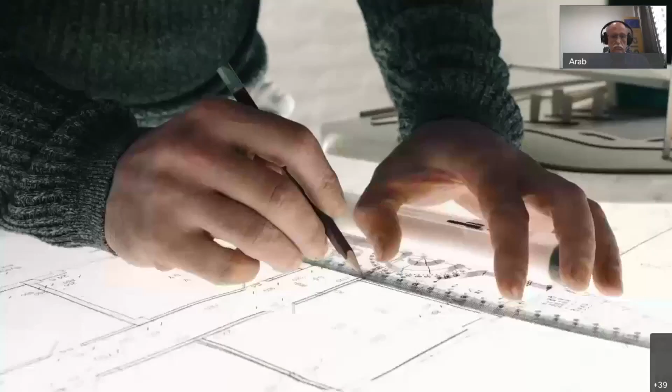Did you ever wonder how your home can improve the quality of your life? The way homes and buildings are designed and developed has a significant impact on the well-being of communities, people, and the environment.

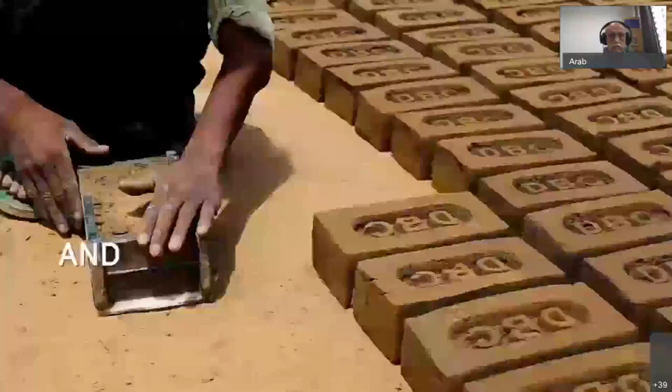In 2019, the Asia-Pacific region has become majority urban for the first time in history. With more than 2.3 billion people living in cities, the need for a sustainable urban future has never been more important. The building and construction sectors are responsible for 36% of all carbon emissions in the world.

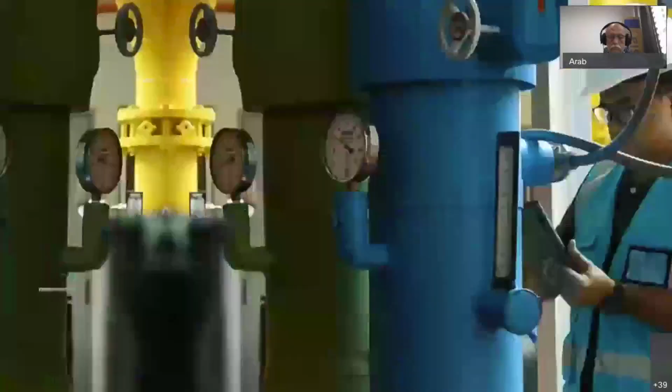Majority of these emissions occur when homes and buildings are in operation, from the energy used to heat, cool and power them, to construction materials, maintenance and renovation.

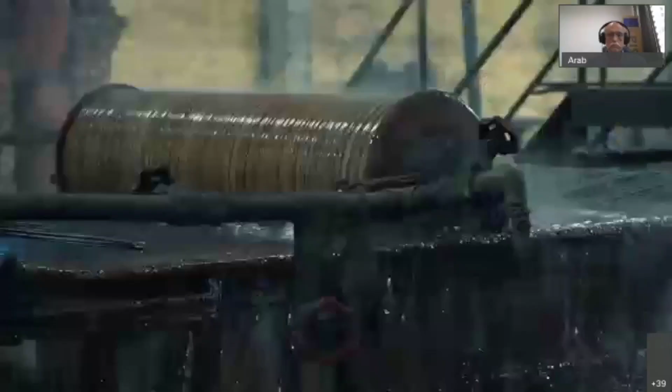Efficient use of resources, energy and water, pollution and waste reduction measures, responsible choices for design and materials will reduce energy consumption and carbon emissions, increasing the value of homes and buildings, driving economic growth, and improving the quality of our lives.

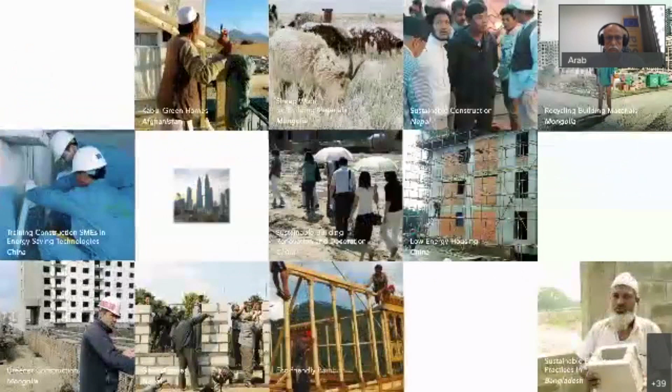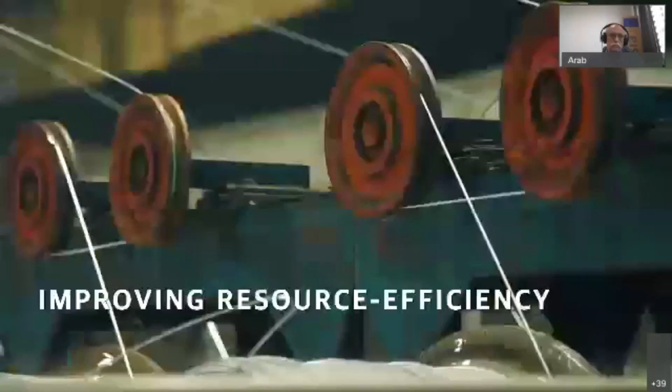Since 2007, Switch Asia has implemented 15 grant projects contributing to sustainable housing in South Asia, Southeast Asia, and East Asia. The program is also providing technical assistance to Pakistan on Green Building Code, and to Kyrgyzstan on energy efficiency in the construction sector.

The important support of the European Union results in improving resource efficiency and cleaner production, increasing energy-saving housing solutions and access to finance, and contributing in all countries to national strategies and policies on climate mitigation. The green recovery must begin where we live, work, and study.

Each one of us can make a difference. It is our common and shared responsibility.

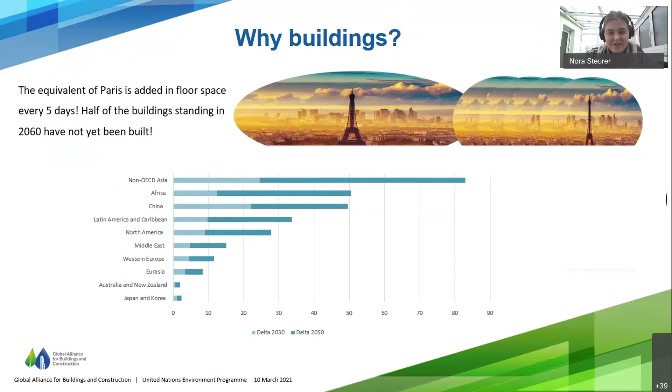A few words about us, for those of you who don't know us yet. We were founded at COP21, and we really have at the heart of our agenda climate action in the built environment. Our mission is a zero-emission, efficient and resilient buildings and construction sector.

We started with 79 members, and we're now over 160, among which are 30 countries. Our 3 objectives include to be a global advocate, to give the sector a voice in the climate debate, to be a trusted platform for setting targets and tracking progress, and to support countries in setting priorities based on their situation. I want to talk to you a bit about tracking progress.

These figures come from our latest Global Status Report for Buildings and Construction. This is an annual report which comes out every year to track the main figures and trends in the sector, and it came out in December 2020. What we see here is that 35% of final energy demand is due to the sector, and 38% of global CO2 emissions, which is actually at an all-time high.

So we see that the actions that are currently taken in the sector are not enough to turn the ship around.

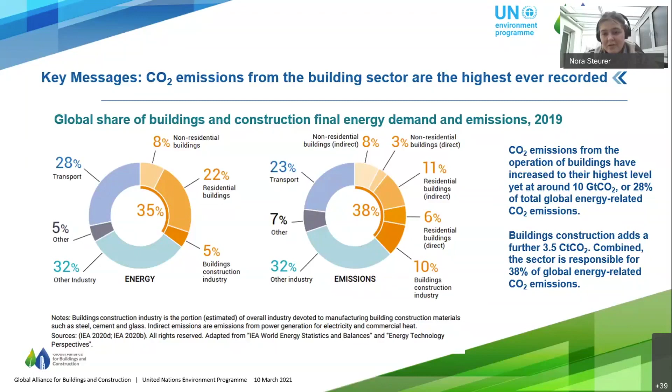This is, I think, very important to underline given the current situation with COVID-19. Of course, it has also impacted the global buildings industry. But we do know that investing into building efficiency retrofits, for instance, is very job intensive. This is good news. And in this sense, it's really good that the European Commission - I think Alessandra initially highlighted the EU renovation wave. Indeed, this is the right way forward, and this is really a win-win for the economy and for buildings.

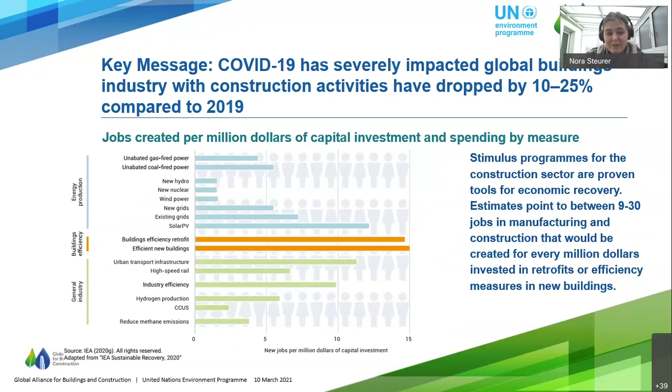Let's take a look at global commitments by countries. Let's take a look at nationally determined contributions. These are a really key vehicle to set the scene for the entire buildings and construction value chain. This can be sort of a North Star, where to go.

And we know that the great majority of countries mention buildings in their NDC, so this is good news. But we also know that the majority don't include concrete targets or measures, that they are not aligned with net zero targets, and that certain topics like cooling, which is also very important in Asia, or resilience, are often omitted. So there's a lot of work to be done, especially in the context of COP.

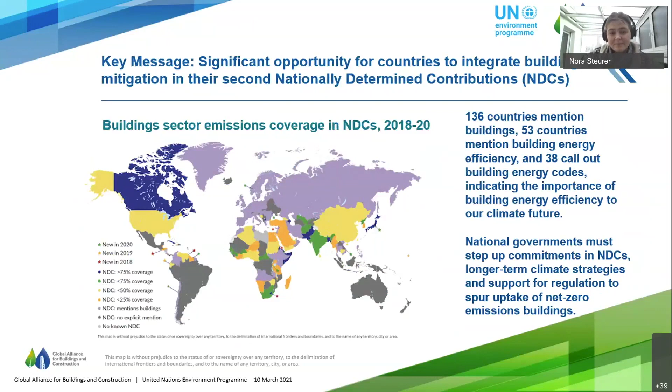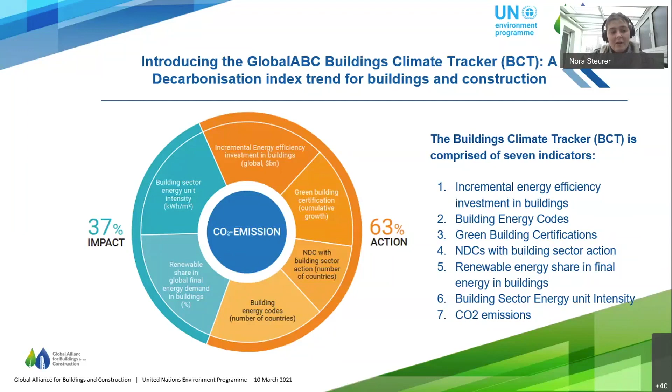We need COVID-19 to be used as an opportunity. We need national governments to include building systematically as building back better in their recovery strategies and in their NDCs, so that on-the-ground action can take place.

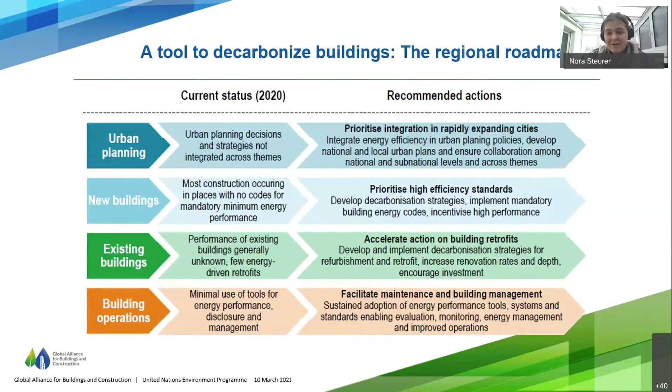I want to stop here. I have some more slides, but I think this gave you an idea. Of course, I'm happy to answer any questions. Thank you very much, and thank you for having invited me. Back over to you, Cosima.

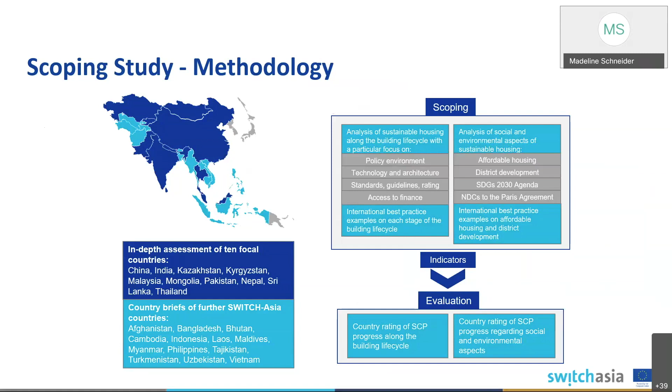I won't be able now to show you all of the details along the life cycle, but I will directly go to the environmental and social aspects of the assessment. In addition to the life cycle assessment in the study, we also covered the social and environmental aspects of sustainable housing. We had a closer look at the SDGs, NDCs, affordable housing and district development programs and the corresponding status in the assessed countries.

Regarding the building sector and more specifically sustainable housing, the most relevant SDGs are SDG 11 on sustainable cities and SDG 12 on SCP. But of course, there are also interlinkages with other SDGs, such as Goal 1 on ending poverty. The level of detail of sustainable housing goals in the countries' strategies varies broadly across the assessed countries. In some countries, already ambitious targets for emission reduction with a focus on energy efficiency measures in the building sector have been established, but others do not yet address housing at all as priority actions. Overall, as the region is one of the most vulnerable to climate change, adaptation efforts are highlighted in most of the NDCs as priorities for sustainable development.

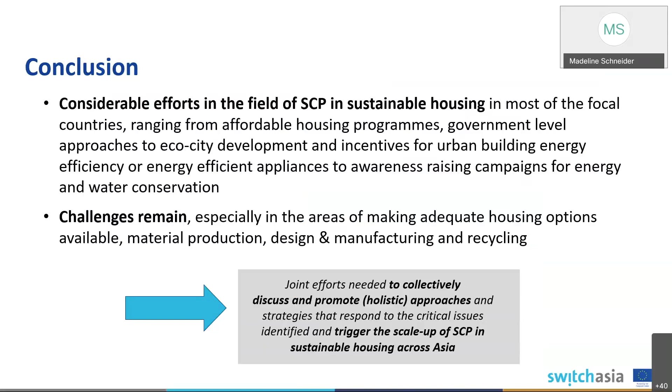But in order to address these critical areas, joint efforts are required to collectively discuss and promote holistic approaches that respond to the critical issues identified and trigger the scale-up of SCP in sustainable housing across Asia.

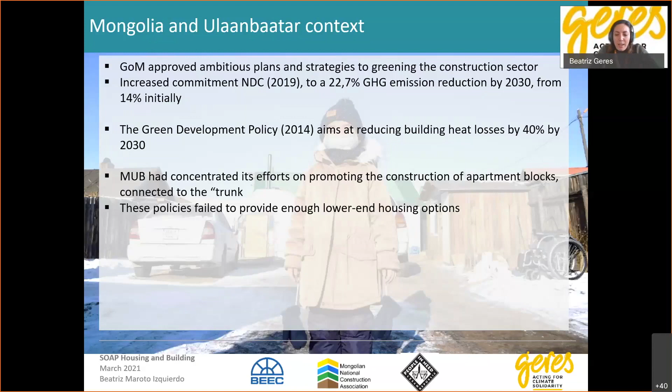So other solutions are being tested, as for instance, free electricity tariff at night to promote electrical heaters. This is helping with air pollution, but not with the emissions of greenhouse gases, due to the electrical grid being inefficient and polluting a lot. And also the problem here is that in the Ger area, the electrical capacity is very low, so it's not possible to implement this kind of solution in all the area.

And also the most successful step so far is the ban of raw coal and the introduction of improved coal. But this is subsidized and is costing around 12 million euros. So I want to highlight that in Mongolia, the electricity and the coal are very much subsidized.

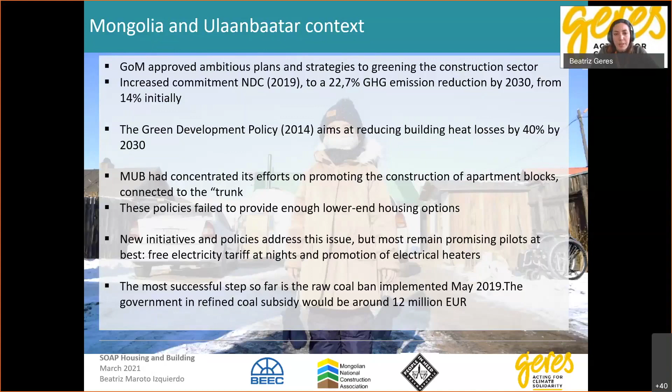This is important to understand because what the project is trying to do is to intermediate the market, to switch the market into a market focused on the Ger area for insulating the houses at a fair price, and the aim is to reach 1,000 houses and avoid 3,000 tons of equivalent CO2.

And we need to understand that almost 80% of these houses need and can be insulated. So there is a need that needs to be covered, but unfortunately the demand is low because the majority of the homes are not aware of the benefits of insulation and also lack investment capacity.

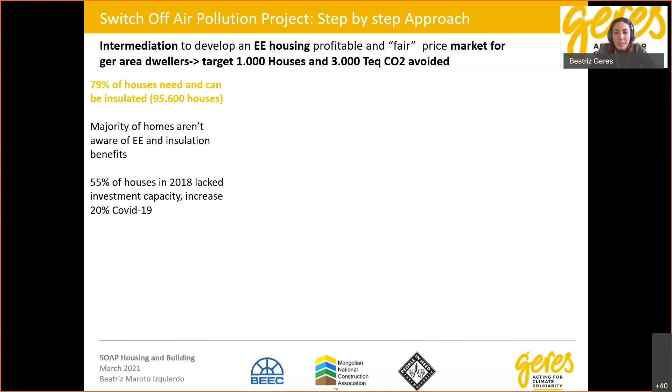So the project developed a ladder of products to try to be more inclusive and to try to give solutions to everyone. It's using a market approach because it's more sustainable and it's also contributing to circular economy and green jobs.

So the project started implementing solutions according to the technical code, but unfortunately the prices were over what the majority of people could afford. And this is the delivery model that was developed for connecting suppliers with green loans and financial institutions, governments, and households.

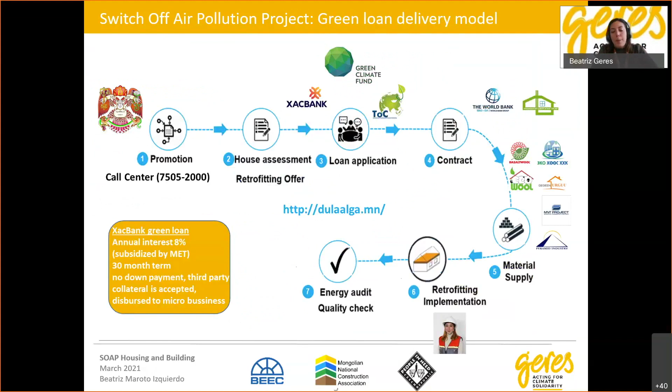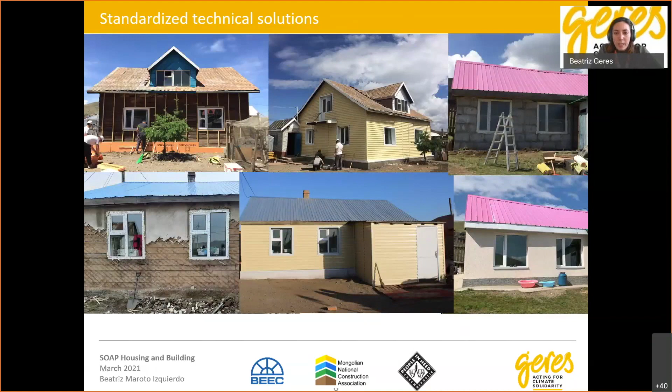And these are the solutions we have developed considering the different typologies of houses. We see the before and after of the insulation. So these are corresponding to the last step of the ladder, and unfortunately we realized that the majority of people could not meet the green loan requirements or afford all the solutions.

So we developed a step-by-step approach, aiming to encourage people to insulate their house with a very little amount, to start feeling the comfort, to start feeling that the air quality is better, and as they have more money, start implementing more solutions until reaching the last step.

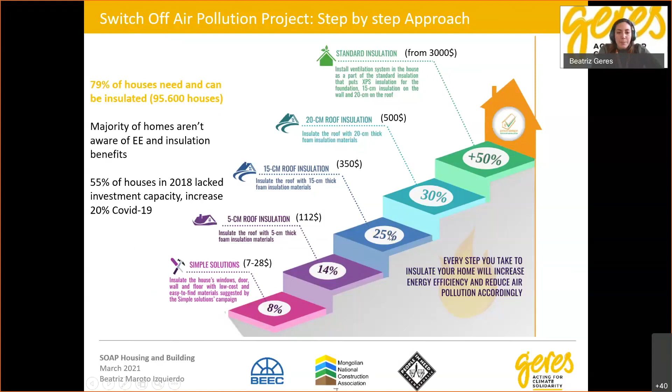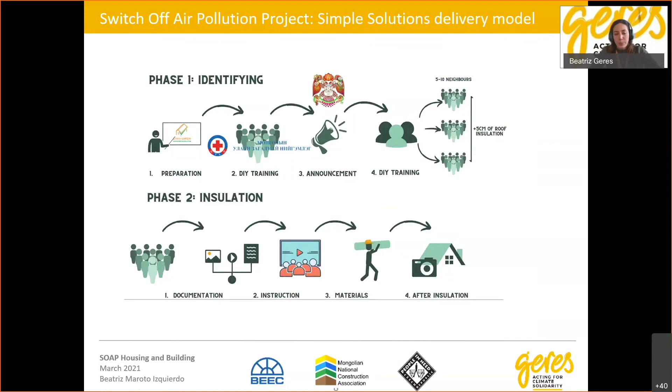And to do so, we also developed another delivery model, this time based on a word-of-mouth approach, to try to share with the community the knowledge about insulation and to encourage them to start insulating their homes. These are the very, very basic solutions, $28, including curtains, door insulation, floor, wall.

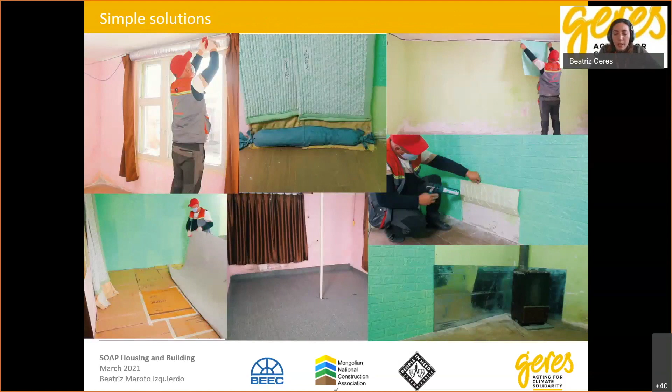And we know that the insulation is having a very good impact from the social perspective. People feel warmer, cleaner indoor quality, the temperature fluctuation has decreased, the coal consumption and daily expenses are cut in half in these cases, but the saving is spent on food, which is very important. Unfortunately, the savings are not that high because of the subsidies. And they are starting to promote insulation to their neighbors and families.

So to highlight about the project, it is very important to have a good understanding of the context, above all of this vulnerable population. There was very little knowledge about the conditions, and also about the conditions of the craftsmen working in the black market.

To have a participatory approach, always to get feedback, to improve and adapt better the project and products into the context. We developed the delivery model and linked it to financial institutions like green loans, because we think it's very important. We also standardized all the process, and this has been leveraged by other donors and public authorities.

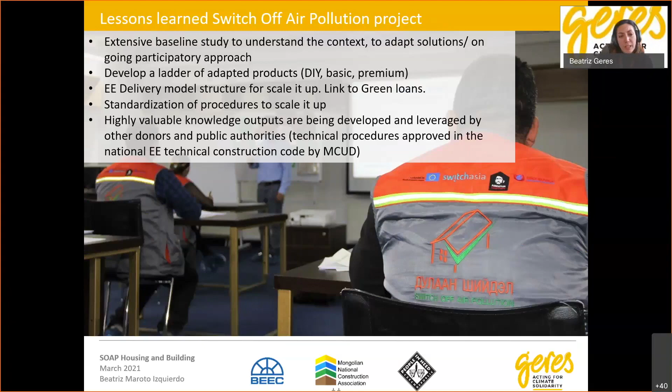For instance, the technical procedures were approved in the 2021 National Energy Efficiency Technical Construction Code this year. So this is a bottom-up perspective to implement energy efficiency measures.

And we are using brigades, labor working in the area, empowering local communities and improving people's lives, especially in vulnerable areas, and addressing increased awareness and energy literacy, contributing to poverty alleviation in a sustainable way through the market. That's all, thank you very much.

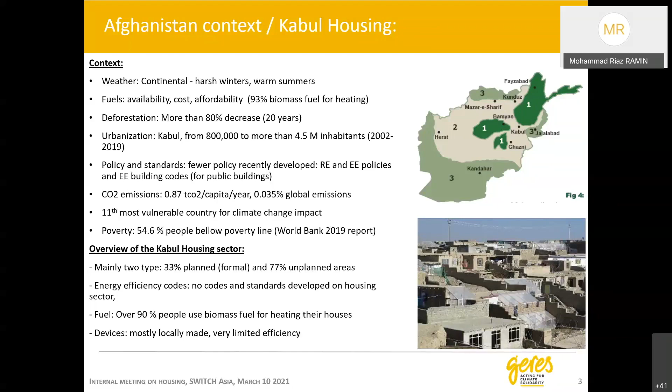The housing needs in Kabul: of course, people need to warm their houses during winter months when the temperature goes to -10 or more in Kabul. They need to improve the heating systems because they are very basic and the devices are not efficient.

The indoor air quality is in most cases very poor because the devices are not standard, and people use biomass fuels. That's why the indoor temperatures are not good enough for residents. The fuel wood or heating fuels are not efficiently used because the devices and heating systems in the housing are very inefficient, with a lot of heat losses and very low efficiency.

Now a few words about the Kabul Green Home project. It is a 5-year project implemented in 15 districts, mostly for the most vulnerable people who have difficulties providing heating fuels and energy, and who deal with poor indoor air quality and comfort in their houses. It was a market-based, energy efficient solution developed and provided to residents through trained artisans and SMEs. The project was implemented by a consortium led by Geres, an international NGO and rural movement organization in Afghanistan, with the Microfinance Association as a partner.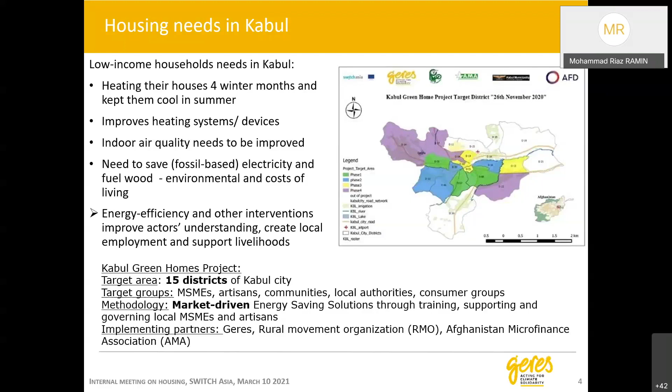A big range of solutions has been developed and promoted in Kabul city - more than 10 types, including solar verandas, thermal insulation packages, improved local kitchens, solar cookers, and so on. This is because the Kabul housing market is very complex, with so many types of housing, and we tried to develop solutions covering as many housing classes as possible.

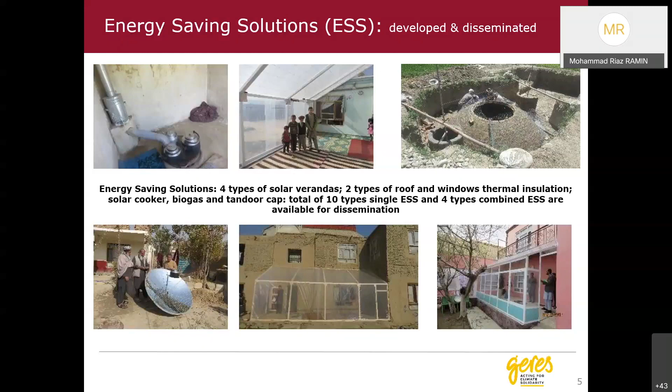People were not well aware of the climate change impacts or the energy efficiency techniques and solutions developed by Geres and the partners. Through the awareness campaign, we informed them of the challenges, and in parallel offered them the solutions developed by the project. Thanks to the awareness campaign, over 4,700 houses are equipped with energy efficiency techniques, and self-replication or self-dissemination strongly continues even after the end of the project.

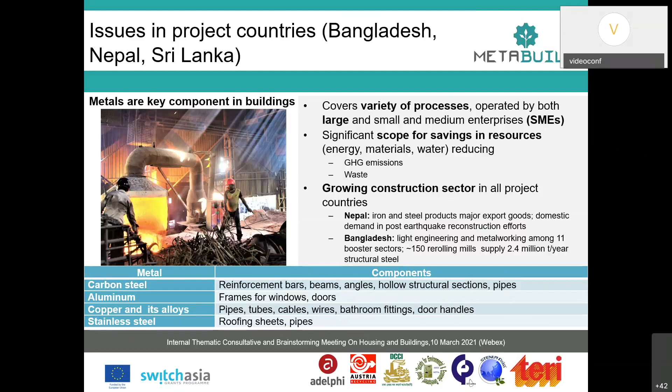So in this project, what we found was we worked with 403 metal SMEs, and we implemented resource-efficient cleaner production measures. And we got a total savings per annum of around 3 million euros. These accrued from savings in energy, water, materials. As you can see, they were substantial, in terms of almost 34 million kilowatt hours of energy.

49 million liters of water, 4.4 million kilograms of material. These are all per annum. At the same time, we had waste, which was minimized, about 0.7 million kg per annum. And the CO2 emissions reduction as a result of the energy savings was almost 13,000 tons equivalent.

And in order to achieve all this, of course, we had to engage very intensely with the SMEs with whom we were working. We also had to build local capacity in terms of training local consultants. We also worked with financial institutions so that access to finance could be ensured. And we also worked with technology suppliers for the supply of clean technologies.

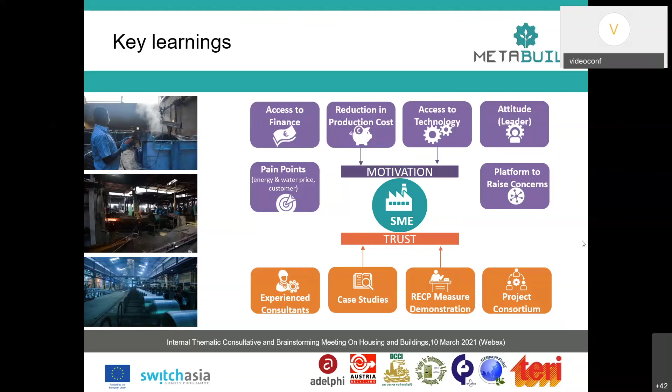So in order to mainstream SCP in the building supply chain, we feel that one of the important measures is that the customers need to support this. Whoever is buying these metal products, they are the ones who have to be able to support resource efficiency enhancement. So that is one important component because the metal products are way down in the supply chain for buildings. We could also think of having benchmarks for resource use while selecting suppliers for resource-intensive parts, and metal components are extremely resource-intensive.

Then, of course, we could encourage circular economy measures, and here we could look at possibilities like use of waste-based products, such as, when you have sheet metal cutoffs, which can be used for manufacturing smaller parts, or you can look at foundry slag, which comes for making components like paver blocks, etc. So provided, of course, that the quality and the functional requirements are met.

The other option is one could keep track of materials in buildings so that at the end of life, the materials can be recovered effectively. And in this context, of course, modular buildings would really be useful for ease of dismantling and reuse.

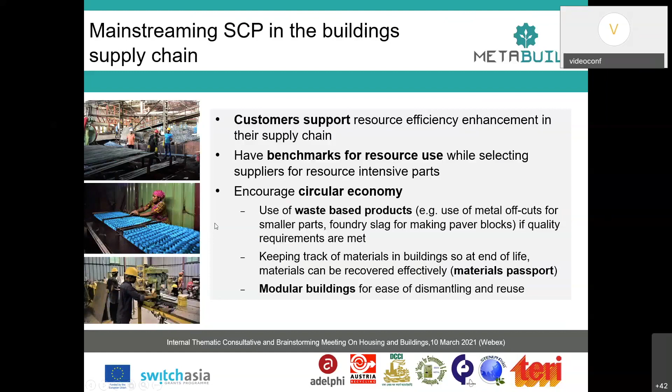Good morning, good afternoon, everyone. Can you hear me? Yes, very well, thank you. Okay, perfect. So I was asked to be very quick, so I will try to be so.

Very same as the previous project that was presented before ours, our project finished 4 months ago. So I am glad to share all the results as well as all the lessons learned that we have collected under the project. I'm also very happy that the Switch Asia program has provided a chance to 2 projects from Mongolia to be presented.

And especially from the construction sector. So our project's objective was to work on construction and demolition waste management. Why did we actually work on it?

Because if you talk about Mongolia, some of you might not have been here, Mongolia is the 17th biggest country in the world, and the construction sector is actually booming here, especially in the capital of Ulaanbaatar and in other provincial centers.

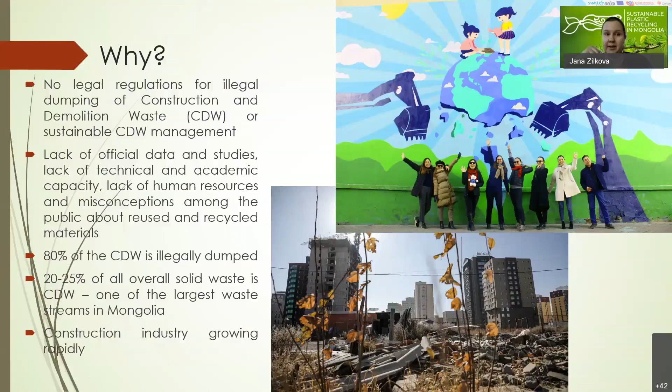What are the potentials for scale up in other regions, in other provinces, or in other countries, and for replication?

What we have done and the results of our project: we have actually produced the first construction and demolition waste-based product in Mongolia that is economically and technically feasible in the Mongolian context. This particular activity was conducted by our local partners that were trained in the European Union, and they conducted all the research and studies here in Mongolia.

We also created a university curriculum and online classroom training platforms for non-formal education. Also, the first legal procedure on construction and demolition waste management was approved and implemented by the Ministry of Construction. This procedure is in place at this moment, and all construction and demolition companies have to follow it. We have also successfully adapted all the EU policies.

Lessons learned. There are, of course, many lessons learned, and I would be happy to share the long list, but I'll focus on a few particular aspects. We think it's really important to engage professional associations and CSOs in the sector and create awareness among them, because we realized that it's not only the public, but it's actually the SMEs themselves that do not really see the importance of having a sustainable construction sector.

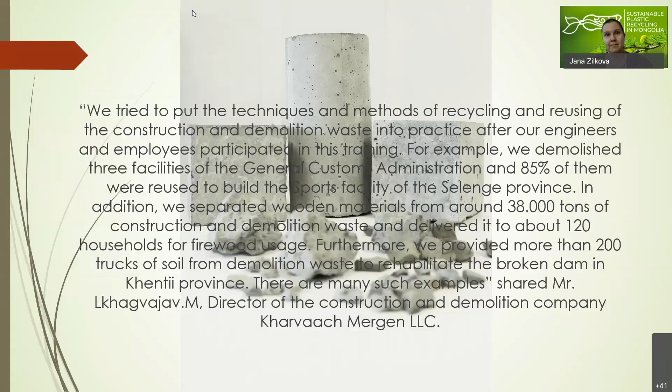Great, thank you very much, Jana. And given that we don't have that much time left, I would say that we now jump into the policy level contributions, and then have the opportunity to discuss maybe also a little bit longer than initially presumed, because the presentations and also the excellent questions already took up some more time than planned.

So I would like to welcome Mr. Javed Khan and Mr. Irfan Tariq from Pakistan to contribute from their perspective, both with the experiences of the assignment in Pakistan and also with a wider perspective on the housing sector. As said previously, it would be great if you could stick to approximately 5 minutes for your contribution.

Thank you. Thank you very much for this opportunity. I have with me Mr. Javed Ali Khan, who would be supporting this intervention. And since you have asked me to be very precise, I would start with the 3 basic questions I need to actually answer in this intervention.

The first one is, how do we shape our decisions in housing and building at the policy level? I represent the Ministry of Climate Change, which has a dual mandate of addressing climate change and also addressing urban issues. We have a number of international obligations in this regard to implement, such as the Paris Agreement for reduction in GHG emissions, and the Habitat Agenda, and the SDGs related to sustainable consumption and production. So at the policy level, what we are trying to do is integrate whatever our international obligations are.

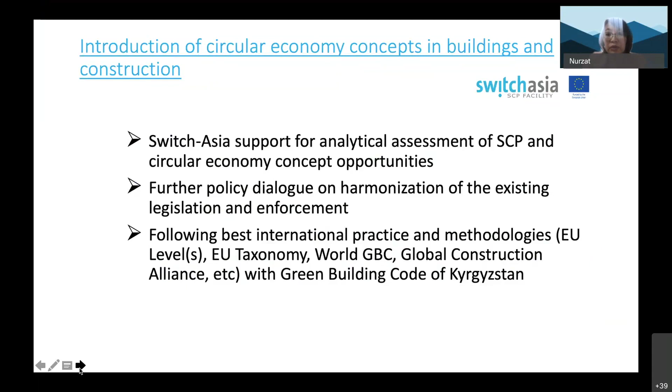And of course, there are existing market constraints for adoption of such an approach and concepts. This exists at several levels. One is policy and regulatory insufficiencies. Then there are institutional constraints, lack of capacity on the business community among policymakers or financial institutions, lack of qualified professionals for SCP-related services.

Of course, there is also low awareness and information asymmetries among market stakeholders, which limits the demand for SCP due to a lack of understanding. Market barriers mostly come out of previously listed challenges, and also include SCP technology solutions, higher price services, and barriers such as existing high prices on import duties, etc.

So within the technical assistance given by Switch Asia to the government of the Kyrgyz Republic, there is an ongoing study named Sustainable Consumption and Production Tools and Circular Economy Approach in Building, with a focus on energy efficiency. And there are some lessons learned and recommendations.

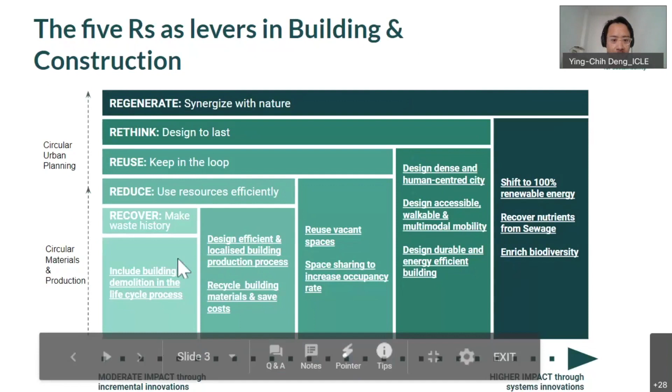At ICLEI, in working with local governments and our member cities, we recommend a 5R framework as the levers in the building and construction sector, used in an incremental and integrated way. We call it the 5R framework: recover, reduce, reuse, rethink, and regenerate.

For recover, for example, we encourage including building demolition in the life cycle process. In the case of Paris municipality, design for disassembly is recommended in the building code.

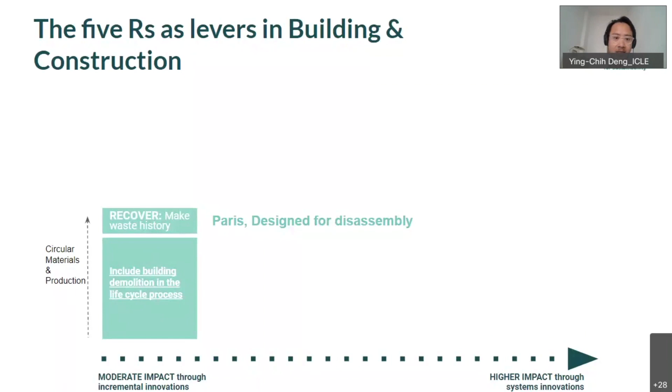For reduce, cities design more efficient building production processes and logistics, recycle building material, and save costs. In working with the City of Baltimore, we set up a program called Waste to Wealth, where the idea is to deconstruct vacant buildings brick by brick to recover additional value. This program creates 6 to 8 times more jobs than normal demolition industries.

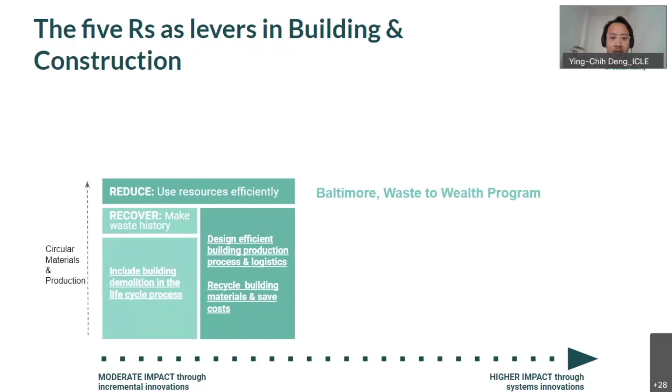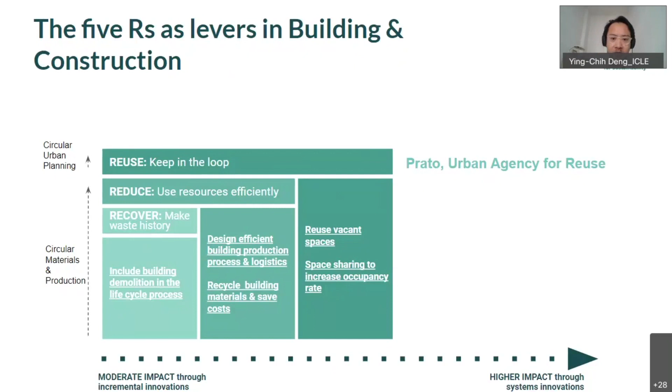For reuse, it's about rethinking and reusing vacant spaces or space sharing to increase occupancy rates. For example, the City of Prato set up an urban agency to reuse current vacant spaces within the urban area, hosting temporary activities or increasing the usage of disused buildings.

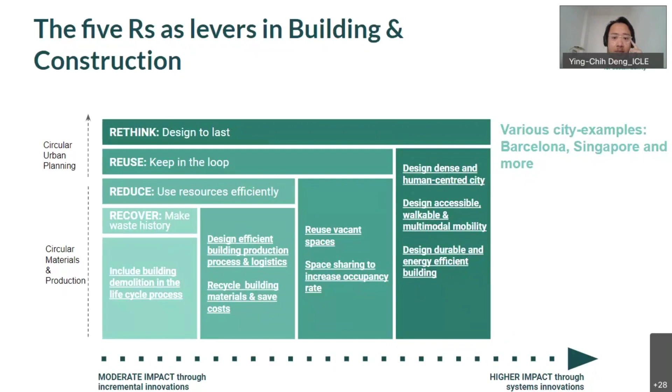And rethink involves using circular urban planning methods, designing denser, human-centered cities with accessibility, walkability, and multimodal mobility. Various cities serve as good examples, such as Barcelona and Singapore—very user-centered, dense cities.

As well as regenerate: thinking about designing the city as a regenerative system, such as adopting renewable energy measures and nature-based solutions into urban planning.

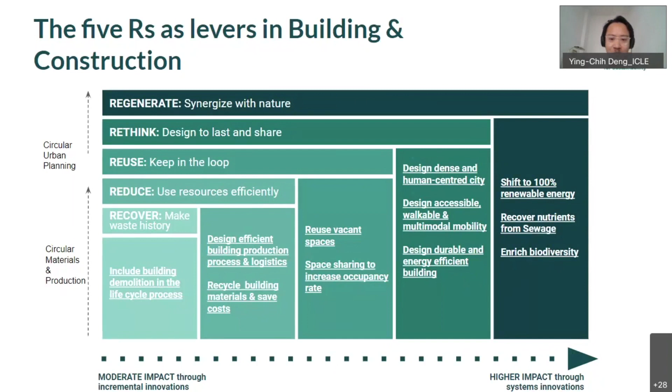I think I would stop here as my short reflection on the presentation today, since we are already over time. I will give the microphone back to Cosima. Thank you.

Thank you very much. Yes, indeed, it is an optimistic outlook, trying to bring the different problem areas together and think about them in systems, because in the end, it is a systemic shift that needs to take place, and that needs to be brought forward by all of the involved levels.